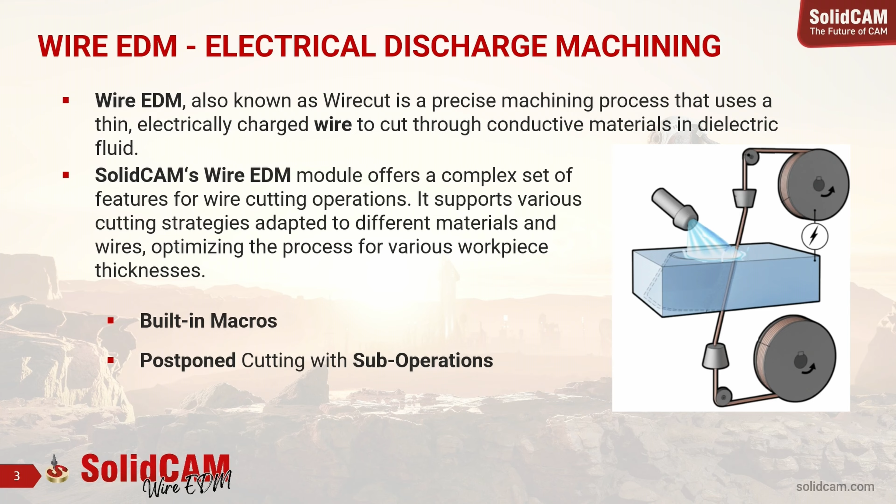Some of the key features of Wire EDM are built-in macros, which include built-in macros from the machine to streamline the machining process. Second is postponed cutting with sub-operations, which is very beneficial for day-night shifts, where during the night we cut the main work, and during the day we cut off everything else under supervision of the operator.

The last one is advanced bridge control to avoid material dropping. In Wire EDM we should never drop anything down, so we implemented very advanced control over the bridges, for rough cut, finish cut, for different kinds of start points, and so on.

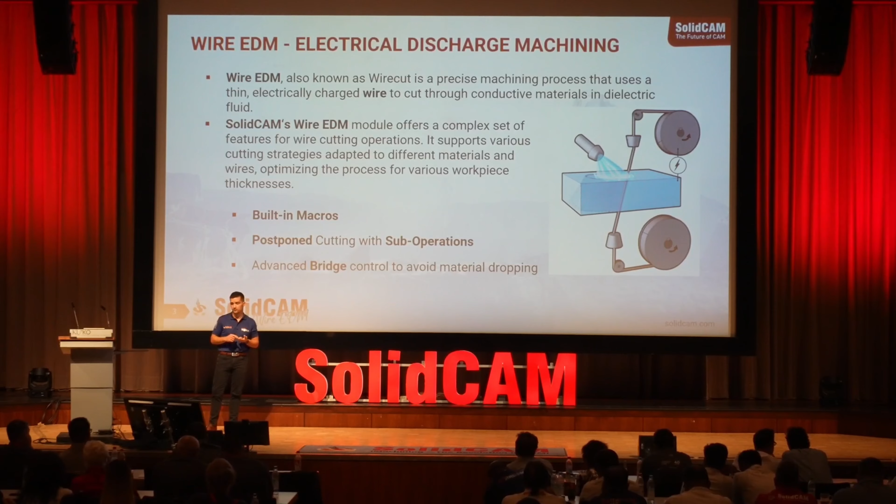So Wire EDM actually comes with 4 different jobs. The first one is called 2-axis, and it's basic profile. You know profile from milling, and that's it.

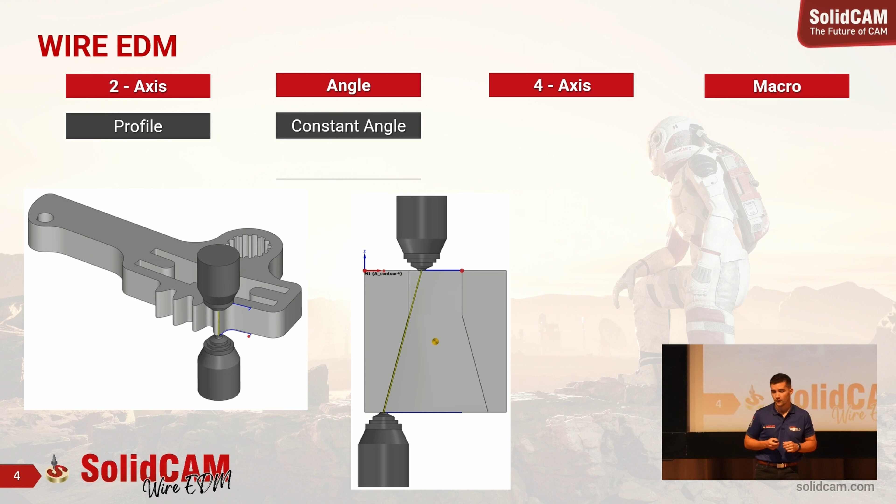Angle, we divided into 2 different types. Constant angle, when we maintain the same angle throughout the whole geometry. And the second type is variable angle, where we offer changing the angle at any moment of the geometry.

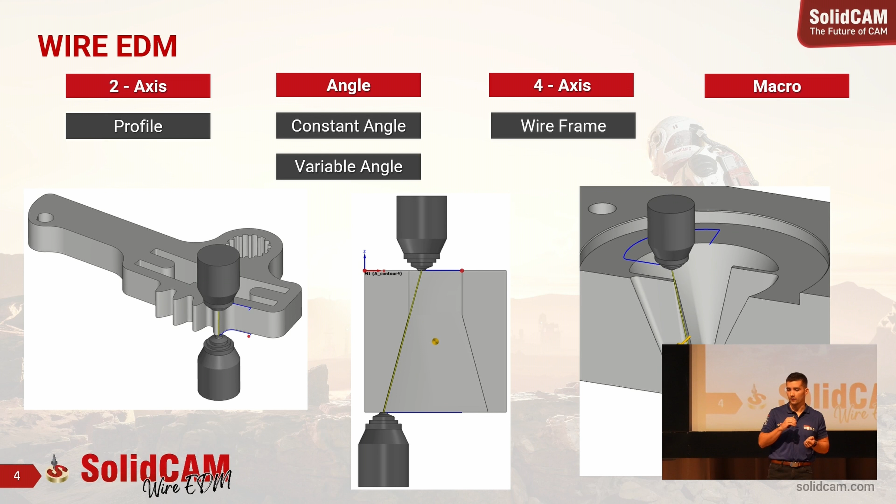4-axis, in other words simultaneous, also comes with 2 different types: wireframe, when we're working with geometries, or solid, when we're working with models and surfaces.

And the last job, like I said before, is macro. EDM data page, or in different words, technology database. This technology database is absolutely essential for your precise cuts. It offers various numbers of wire types, material types, and different solutions.

All of this data comes inside the GUI, inside each operation that I showed previously, and based on cutting depth, stock material, wire material, and wire diameter, we filter the best available technology based on your material for your cut.

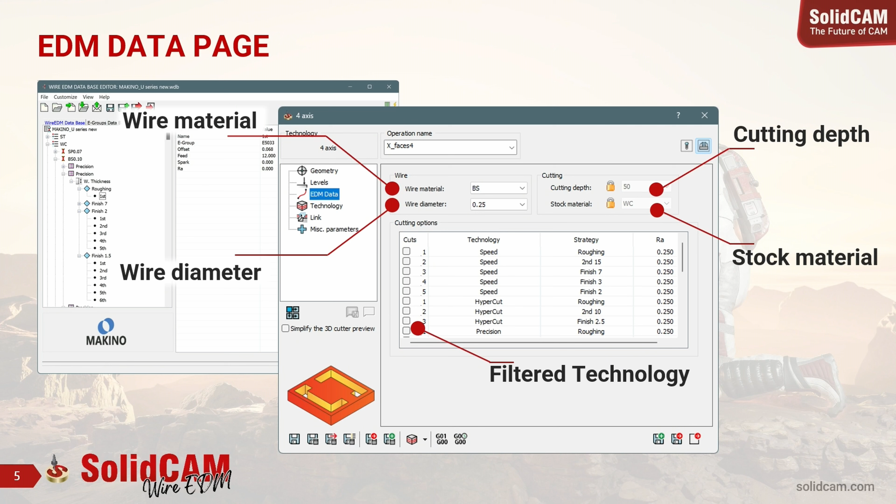Okay, so let's check it out one by one. Profile - everybody knows profile from milling. Like Daniel said in his presentation, SolidCAM is very well known for being easy to use and fast to learn, and in general it's easy. So we worked very hard to take all the benefits from milling to Wire EDM as well.

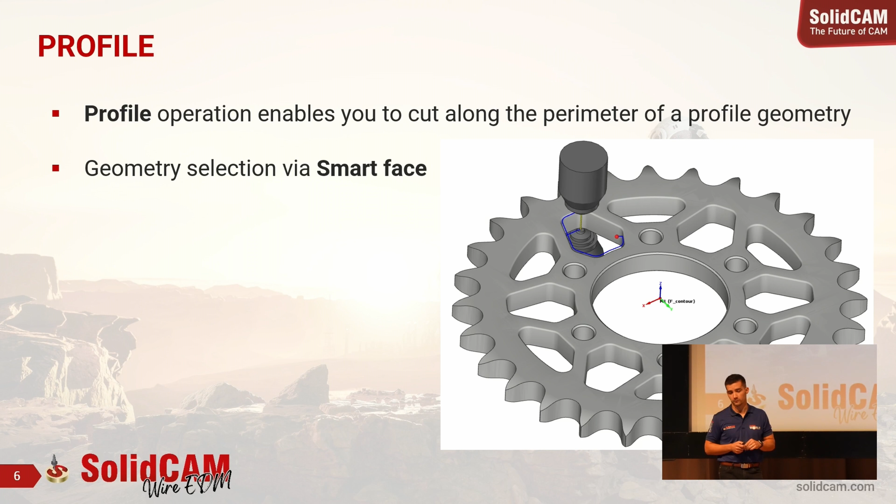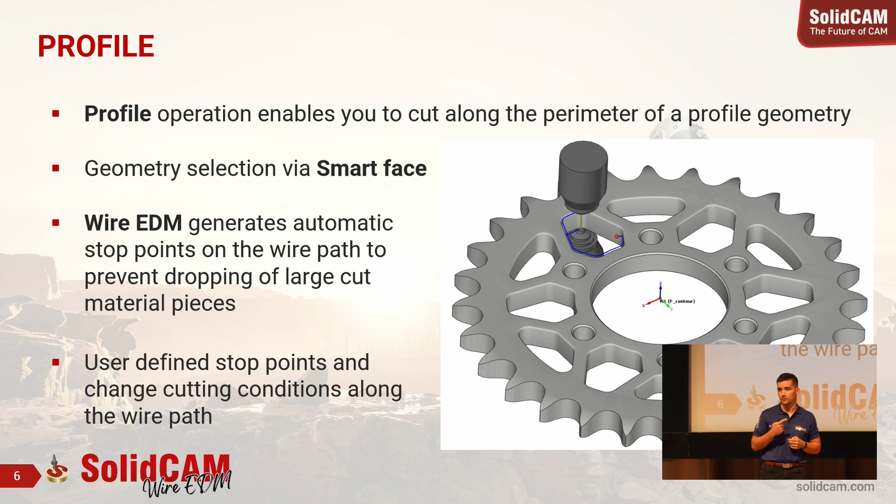That's why we implemented the latest version of Smart Face in Wire EDM, where we can handle very easily everything about the geometry. What is also very beneficial for us is that SolidCAM automatically generates stop points on the toolpath to prevent dropping of large cuts. Also, we have the possibility to change stop points or cutting conditions at any moment of our toolpath.

Angle cutting, like I said, two cases: constant angle, where we maintain the same angle all around the geometry, and variable angle, where we have the possibility to change the angle at each moment of our toolpath.

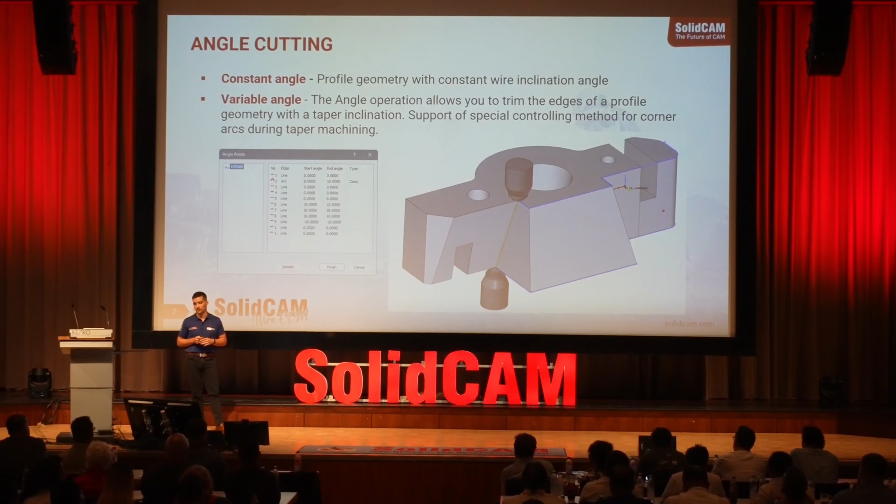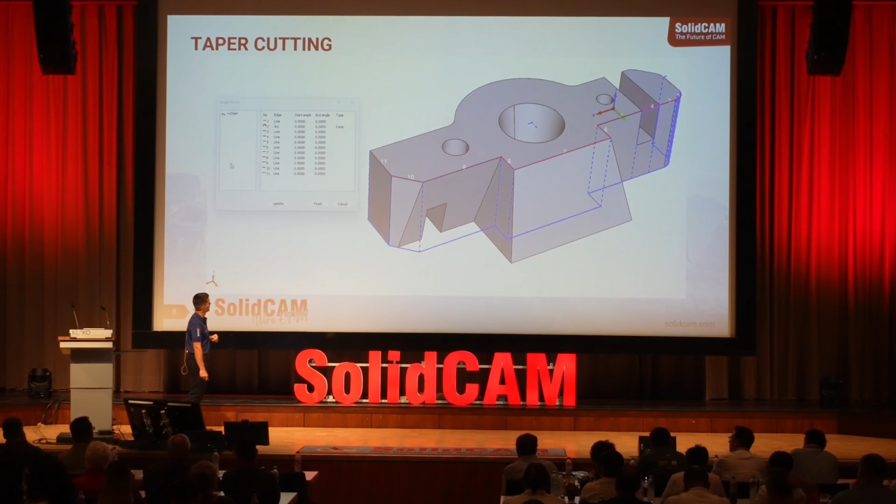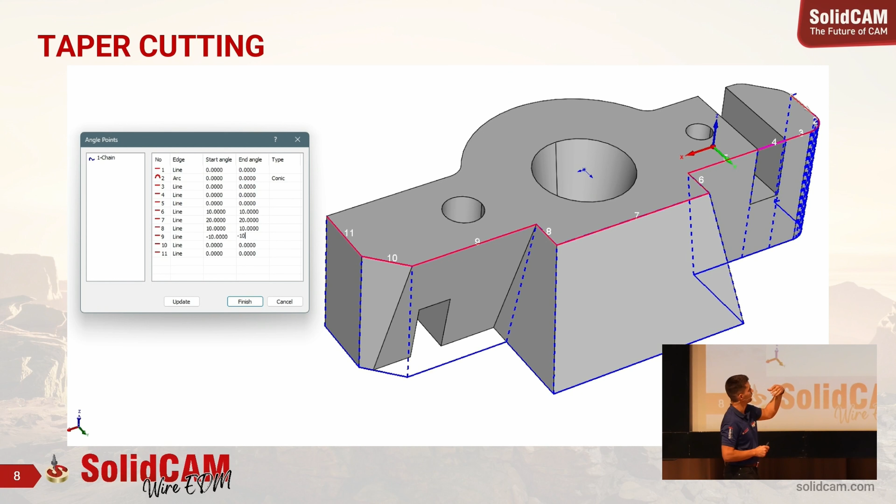In this example, we can see the preview of our geometry, and the graphic design for the variable angle. I can very easily change each line for a different angle, and in real-time, when the user confirms, he immediately sees what he'll get as the resulting toolpath. Very nice.

So now something advanced: 4-axis wireframe, or in different words, simultaneous. In 2-axis, both nozzles are always coming in the same way. In 4-axis, it can go differently.

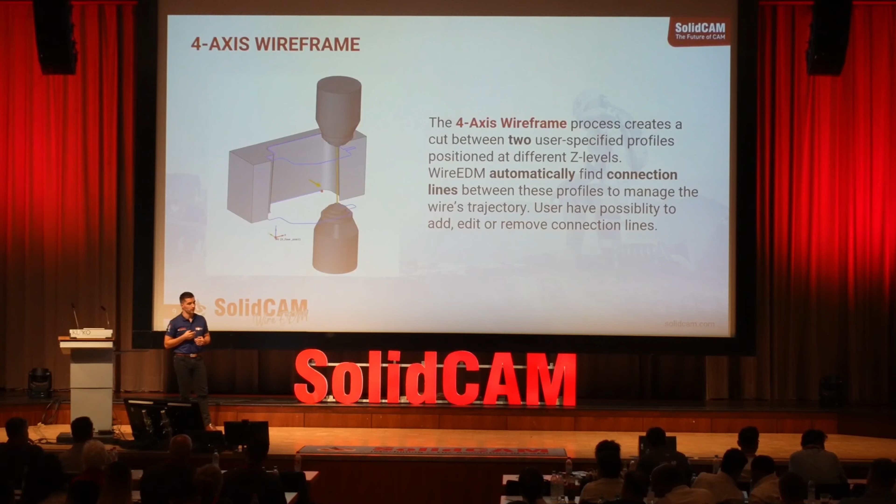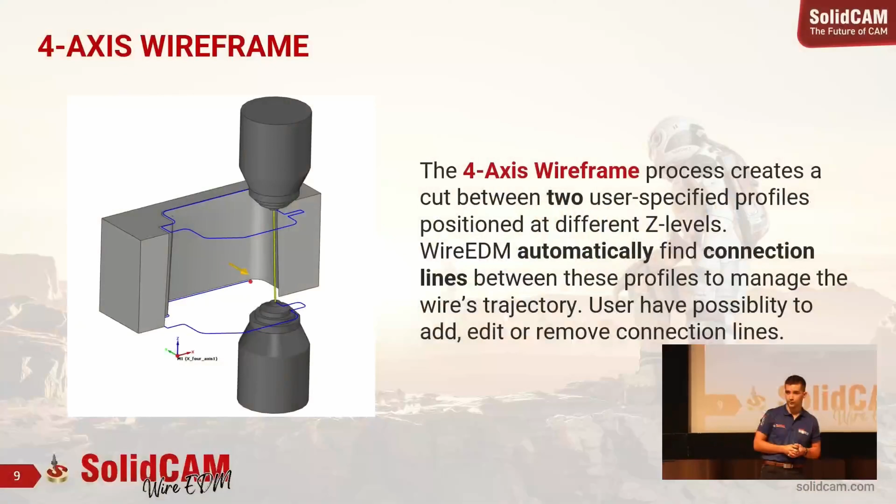With 4-axis wireframe, we need two user-specified profiles, for the upper and for the lower. SolidCAM then automatically finds all the connection points between those two profiles, and according to those connection points, it will manage the wire's trajectory. We still have the possibility to add, edit, or remove those connection lines.

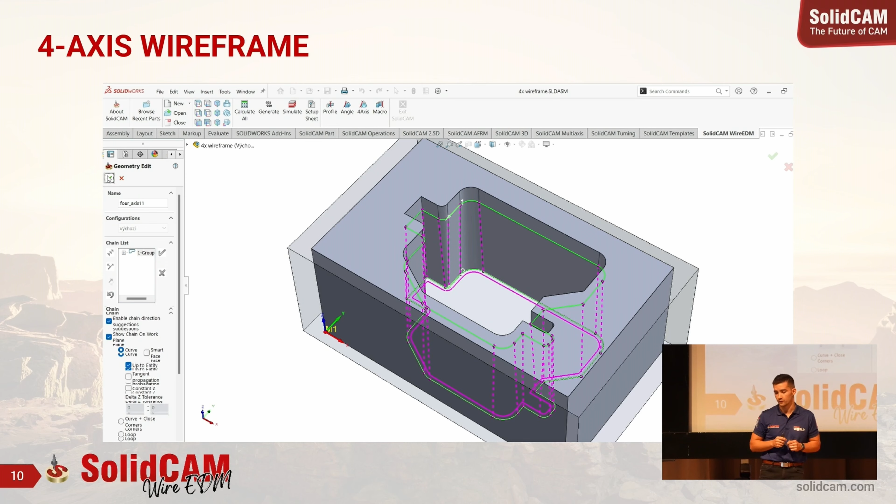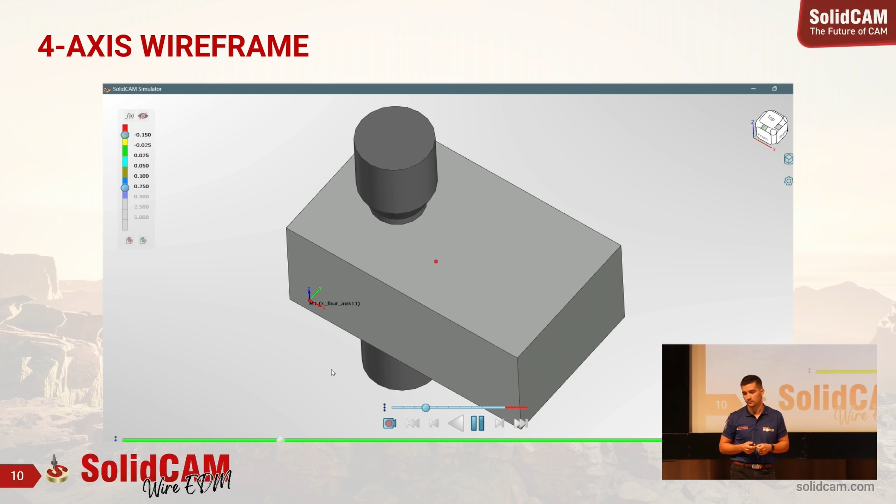So let's check out how easy it is to create a wireframe 4-axis job. I will select new job, new geometry, my upper chain, my lower chain. SolidCAM automatically finds all connection lines. Now I need to select only the desired number of cuts, calculate, and simulate. All is done to make as few clicks as possible. And in a few seconds, we have the job done and simulated.

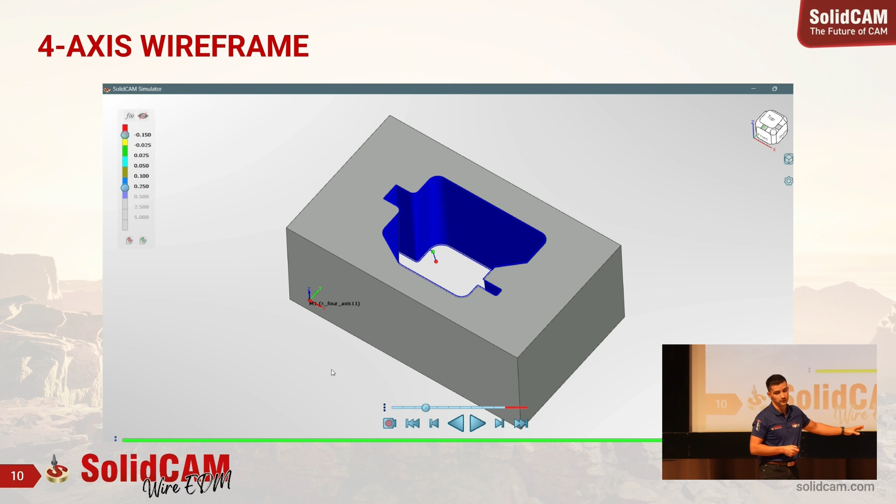It also needs mentioning that lately we introduced in Wire EDM the SolidCAM simulator, which comes also with all the benefits from milling.

Second one, a completely new solution, is 4-axis solid. Unlike 4-axis wireframe, which works with geometries, 4-axis solid works with models and surfaces, which allows us to make complex toolpaths.

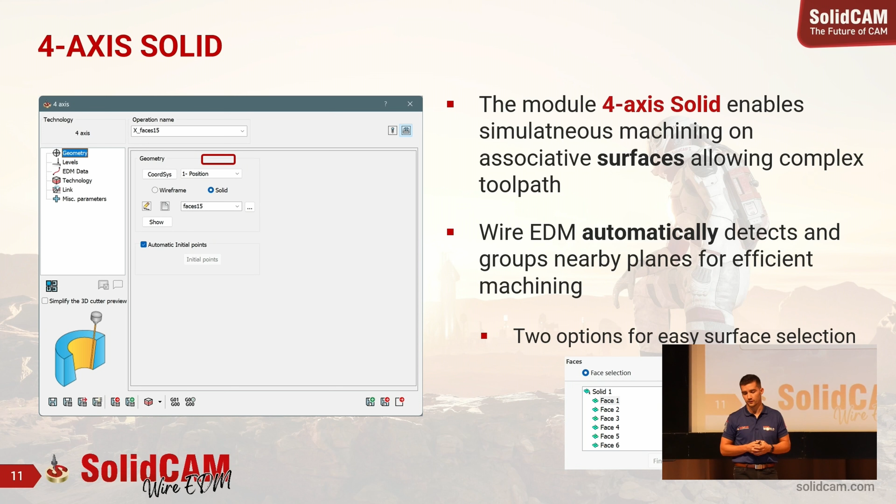Wire EDM works in the way that it automatically detects groups of nearby planes for efficient machining. For selecting those faces, we have two easy solutions. Let's check it out.

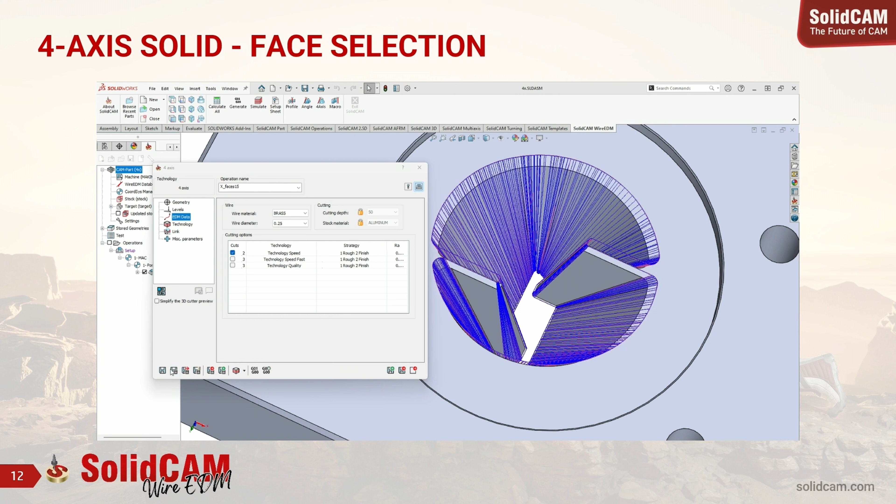The first one is called face selection. In the job, I will switch to solid. I will select one surface which I want and confirm. SolidCAM in one second finds all neighbor faces. Again, I just need to select the number of cuts and calculate. In a moment, I have a very nice toolpath, and in another second, I have the simulation.

In this case, I selected 2 cuts. So the first one, the blue one, was rough, and the second one is finished.

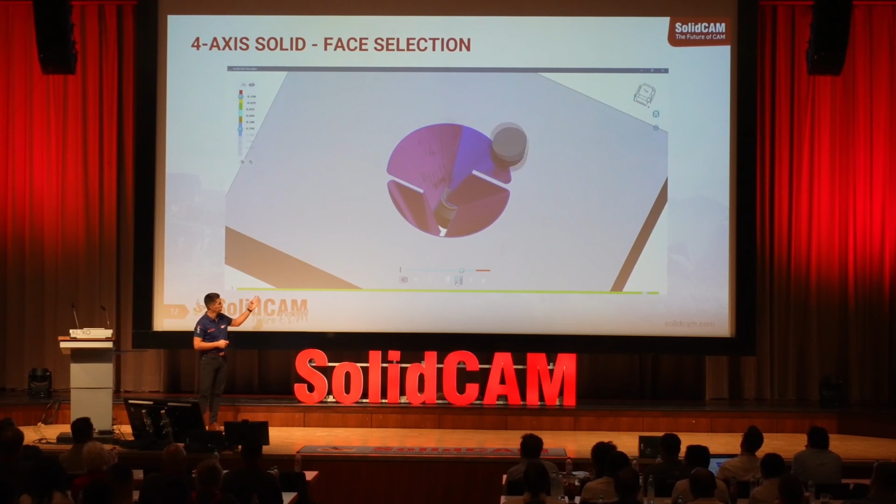And we are done. The second solution for face selection is called from-to. According to the name, it works in the way that we find everything between 2 driven faces. So I will switch to from-to.

I will select my start face, my direction, and my end face. SolidCAM will automatically find everything between those 2 faces, and there is no more clicking. Everything will be done by SolidCAM for you.

It needs mentioning also something called automatic start point. In Wire EDM, it's absolutely crucial to maintain the starting point of your toolpath. So we implemented automatic start point based on updated material, as it is in iMachining 3D.

In this example, I simply turn on automatic initial point, calculate, and I get my starting toolpath inside the pre-drilled hole. Very easy, very smart.

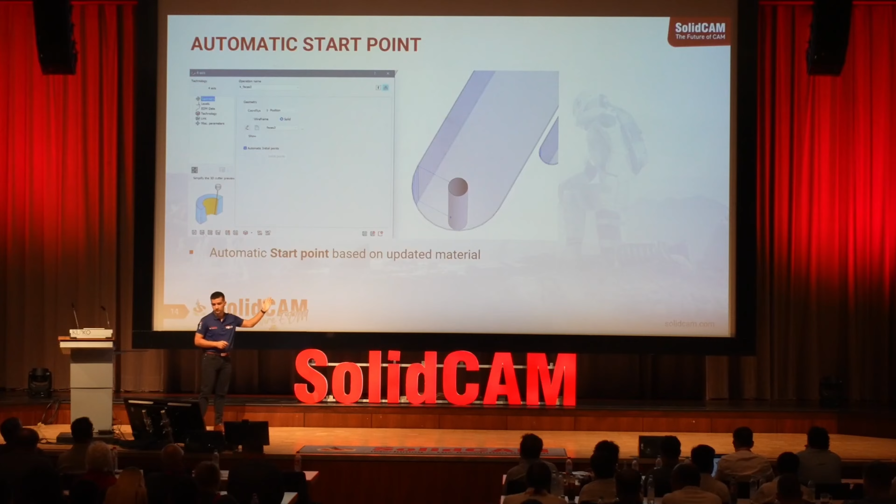We also offer a lot of manual selection with multiple options. I can select directly on the model, directly on the sketch, and even by macro from the machine.

Another technology I want to show you is called destruction cut. Destruction cut removes material completely from the pocket, and this method is very useful for cases when the core cannot be removed, or for increasing the surface quality.

We are coming with 3 different types. Type number 1 is called burn. We are going to remove every single piece of material inside the pocket, and here you can see the very nice toolpath, something similar to our pocket in milling.

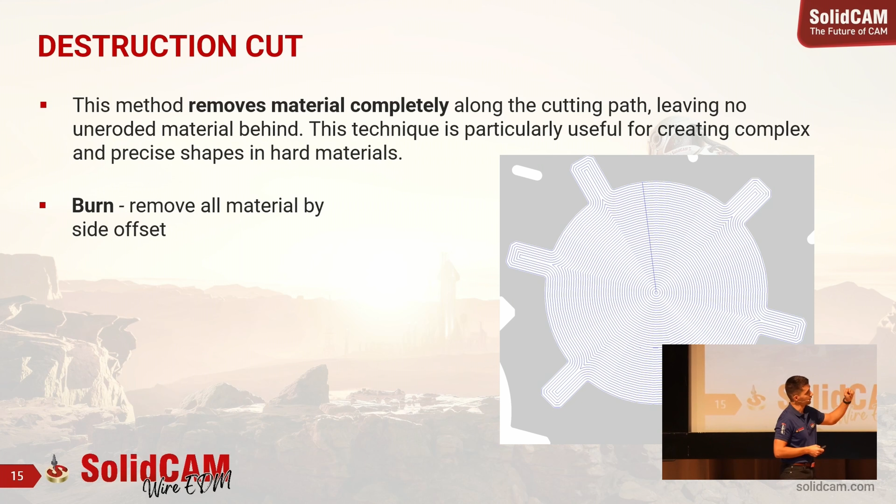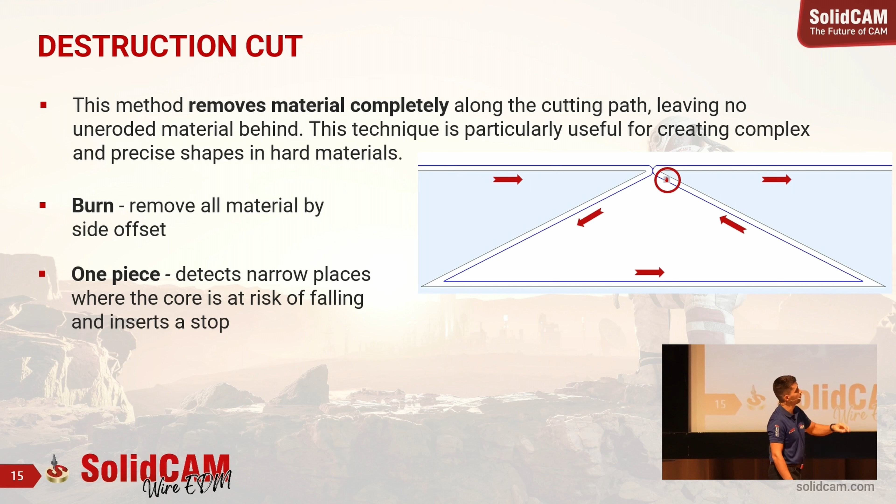The second type is called one piece. We are going to detect very narrow places where the core is at risk of falling, and we will put a stop point. The user or operator can then handle this situation.

The last one is called burn core. We are again detecting the narrow places, but in this case, the core will be completely removed by the wire.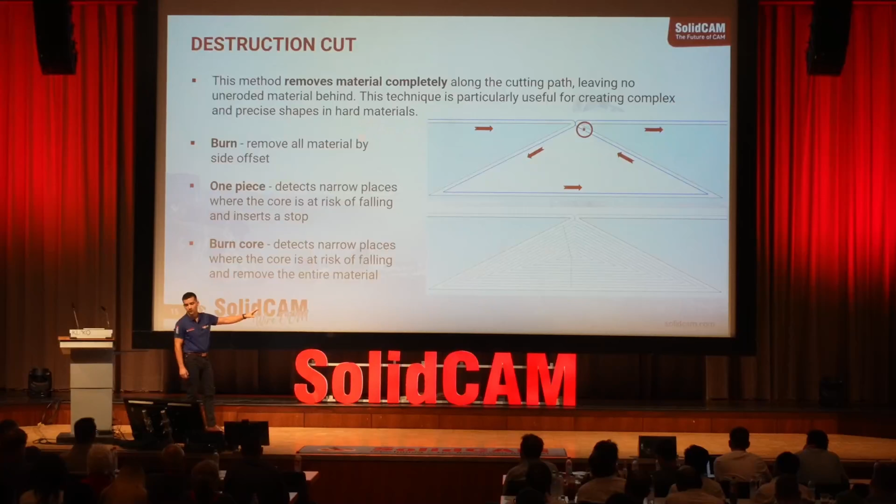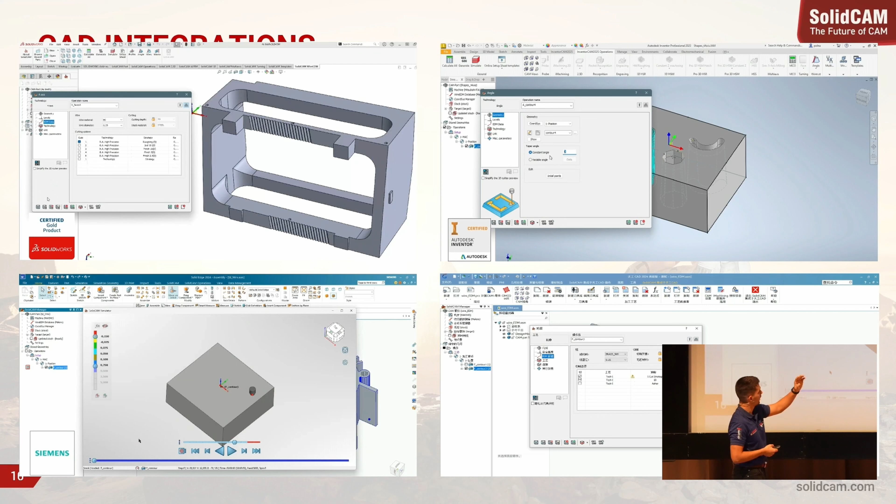Something Emil and Daniel already said several times: we understand that one of our biggest strengths is CAD integrations. That's why we are bringing Wire EDM also inside as basic, inside SolidWorks, Autodesk, Solid Edge, and Tiangong CAD as default. One interface, several different CADs. This is our greatest strength, and we will continue to integrate with other CADs as well.